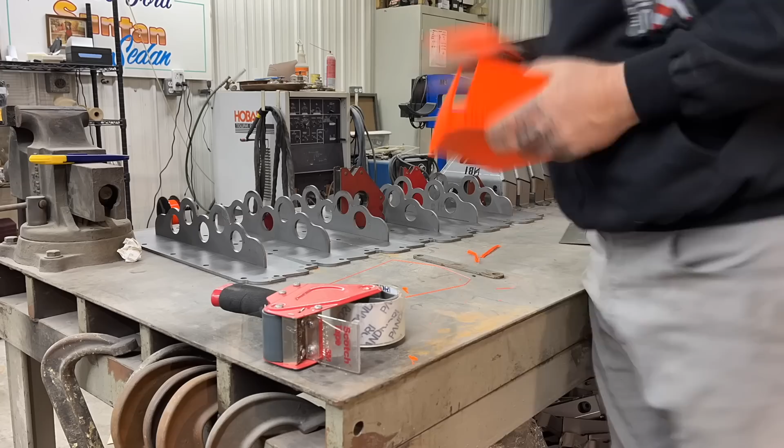Hop in the car, watch it go vroom, vroom.

I told them all that I will

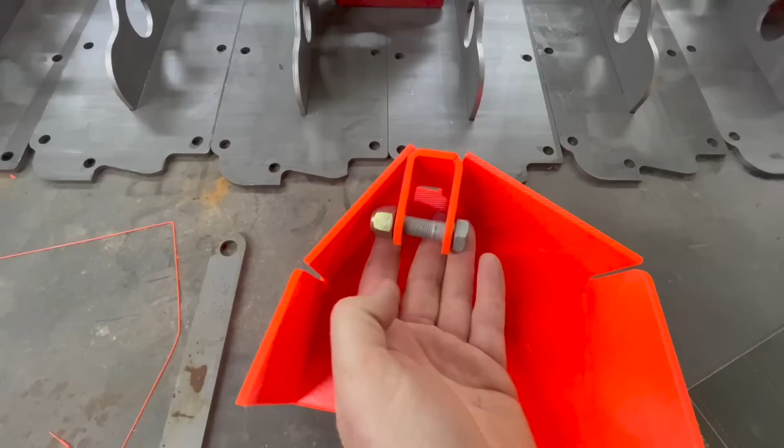So this actually fits a lot tighter than before. Stick it up for you. And it's pretty much just about perfect. The only thing I have to check now is the shock body clearance right here, because before that was the issue I was having. That's why I had to make this longer and redo this and all that, because I had it down here and it just didn't really work out.

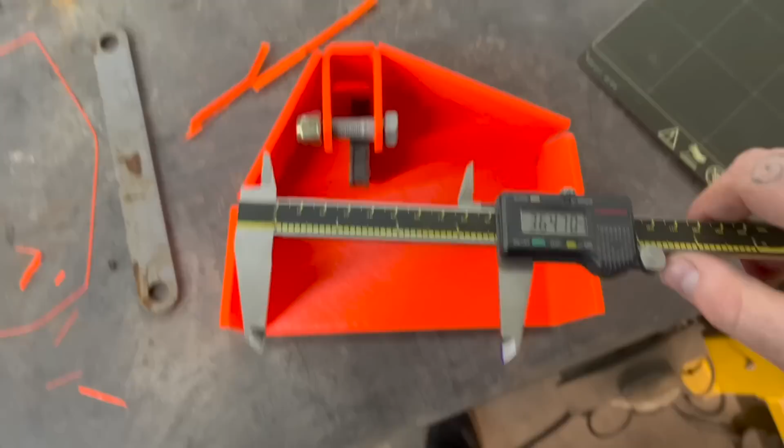So I'm going to have to go grab a shock and see how that works out. So it looks like even if my OD of my spring is a 2.5 inch ID spring, plus say an inch, that's 3.5 inches, we still have plenty of clearance, which the spring probably won't be all the way down here. So I think we're good on that aspect of it.

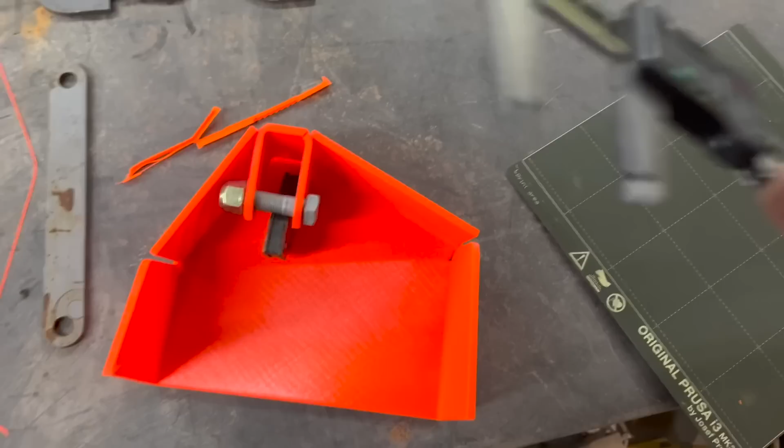So what I'm going to do now is, like I've already said a million times—I feel like I just tell you guys what I'm doing over and over again—I'm going to get these parts welded up so that way I can get these things shipped out to people that have their orders in, and then I'm going to get Lebronze over here and start hacking on it.

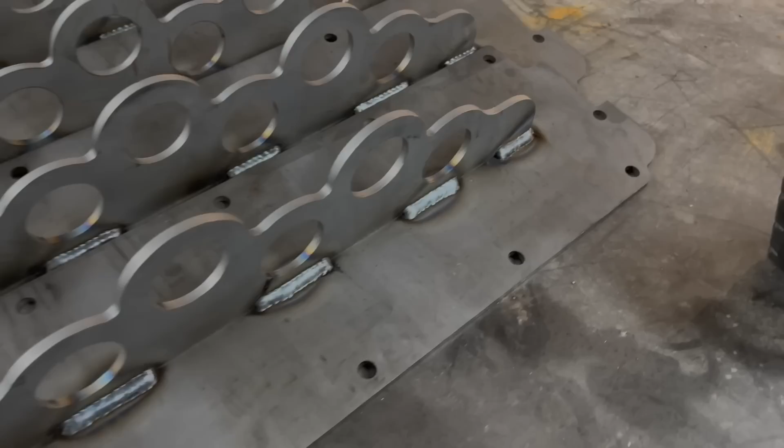I'm in a whip, so I gotta zoom. They tryna talk, they not in a room. I've been so real, I'm dead to the tomb. They in the way, they gotta move. I gotta gas, they running on fumes. Told them way back, it's something new. It's me and Dan, you gotta choose. I'm taking what's mine, I'm doing fine. Don't see the vision, they looking so blind. I hit my lawyer, don't got the time. Crossing my T's and he dotting those eyes. Don't take offense if I do not oblige. I can't belabor like none of these guys. They hit me once and I'm cutting the ties. I was so low, but I'm back on the rise, it's real. Hop in the car, watch it go vroom, vroom. I told them all that I will soon, soon. Knew as a child back in the womb. Oh, told them step back, I need my room. gotta go. I'm looking back, they not even.

Welding is done. I'm just waiting on actual hardware to come in from Grainger for my brackets to ship those out, and I'm just going to go grab some boxes to ship out these motor plates. Everything turned out really nice.

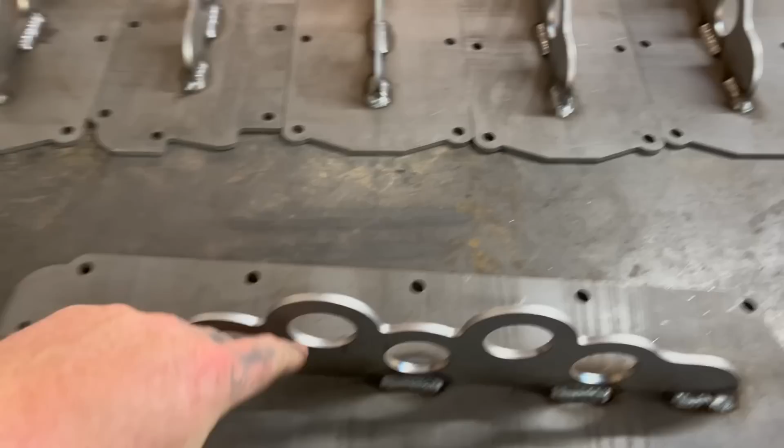The MIG weld's looking pretty dang good, and these are actually, I even welded under here where the 3 pieces locate it, and then ground them flush, so that way it adds a little bit of strength, because I know if people use these the way I use them, they get used pretty tough, so they're pretty rough.

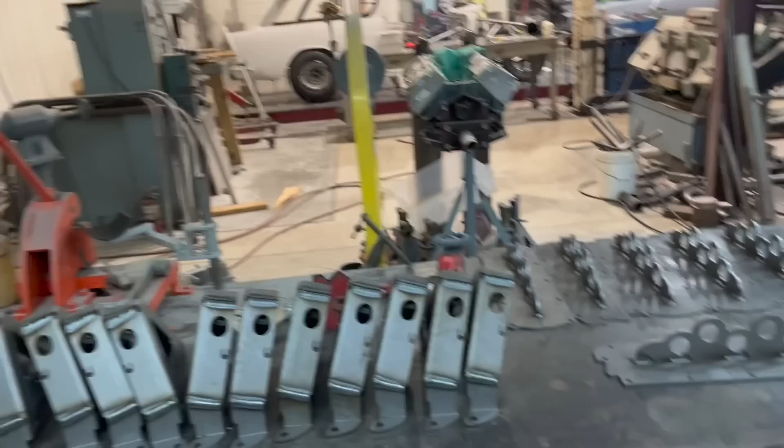All these are looking flossy. Look at that. Ooh, look at that one. Don't call me Domo Arigato Mr. Roboto, but dang, boy, looking like a robot welded these. So, all right, I'm going to pull the Nova in over there and see what I can do with that thing right there.

Stay tuned. The time has finally come. I got my air pump. I'm walking over to Alex's shop where Lebronze is stored. I'll pump up the tires, take them over to Dennis's shop, and I'm gonna actually start cutting on it to get this bracket prototype completely finished and on my site. Because man, I've been trying to do this for a long time. It feels so good.

To finally be able to actually put it on a car. Look at him. This car would be so much cooler if it wasn't a 4-door, but man, I still think it's pretty cool. So I'm gonna air this tire up and fire this bad boy up. All right, let's fire this bad boy up.

Normally, if this thing's already been running, you can just bump the key and it'll freaking fire up. But it's been sitting in here for a hot minute, so let's see. Got a pumper, got that mechanical fuel pump. I love this car. It's so awesome. All right, I'm gonna pull it over to the shop and get to hacking on this thing. By the way, this thing's got all the original interior, all original everything. Now it's about to have that all original Ricky Bobby front travel. Come on.

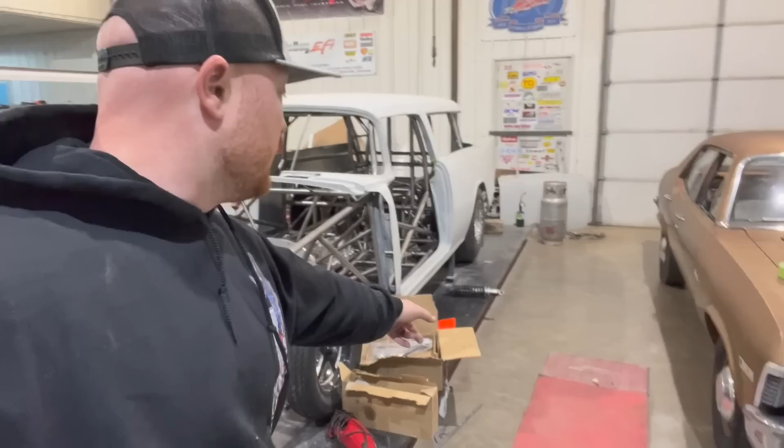But either way, I'm going to give you exactly how much travel this stock V6 Nova has, and then I'm going to see how much I can possibly get out of it. I've got the cheapest control arms. I bought them before I started doing my deal with Trick Chassis, which he's not even really producing Nova stuff yet. So these are the cheapest Performance Online control arms you can buy. They kind of look like the QA1s. I'm going to see how much travel I can get out of it.

I might 3D print me up a ball joint spacer, since I know I don't have an extended ball joint for those, which I know I'm going to need to change. I know it needs more articulation, so I might be 3D printing some stuff. It might be a couple-day process before I ever get the actual max travel out of this, but this is my starting point, and I'm going to take you guys through the whole process.

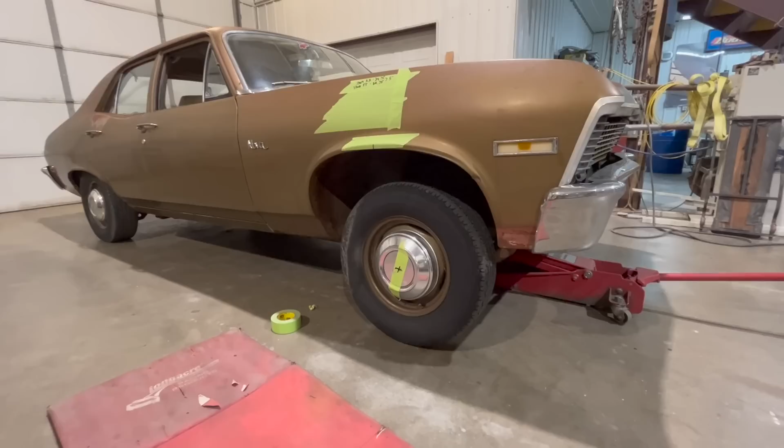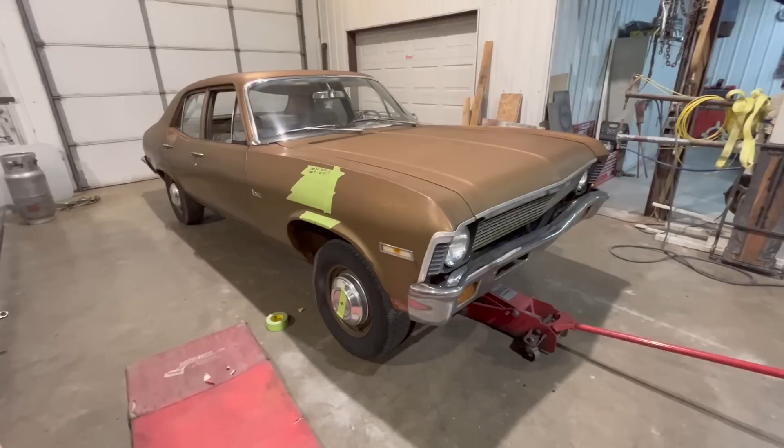So here we are at factory travel. Ride height was 24 3/4, full travel 29 3/4. So we got 5 inches of travel at factory ride height, which honestly isn't too shabby. But one, you don't have adjustable ride height because you don't have a coilover. Two, the spring is short, so you're limited on spring rates. Three, the shock is short and probably has a little less control.

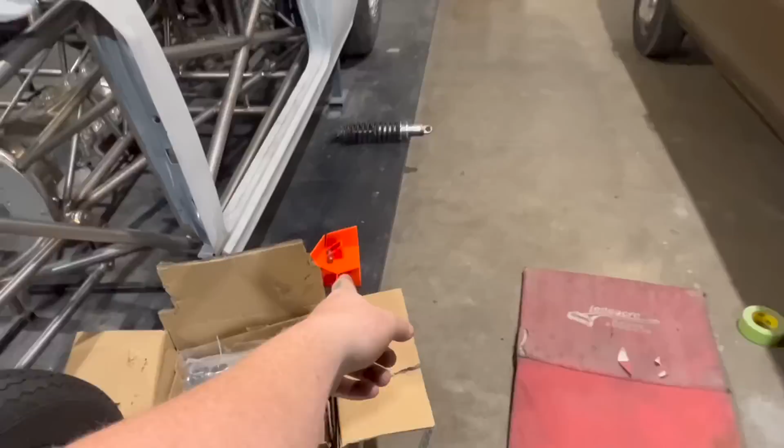So what I'm going to do is pop the hood. I'm going to pull this tire off. I'm going to pop the upper control arm off, take it completely off, and then I'm going to start cutting to try to make this bracket fit. And then once that bracket fits, or if that bracket doesn't fit, I'm going to have to start remodeling that bracket, figure out what I got to do to make it fit. Put that new control arm on.

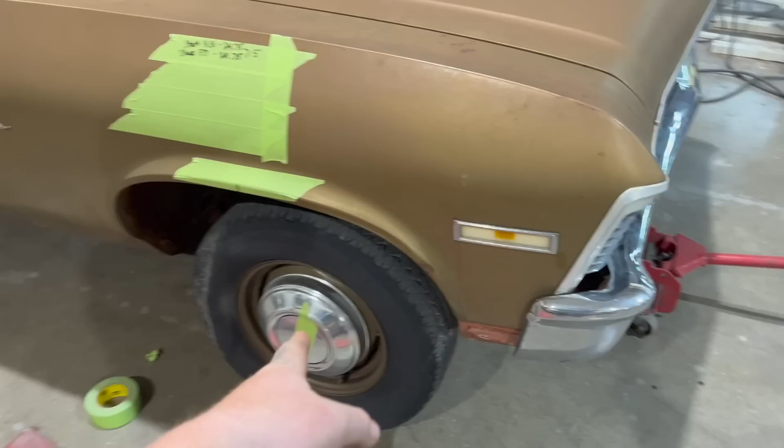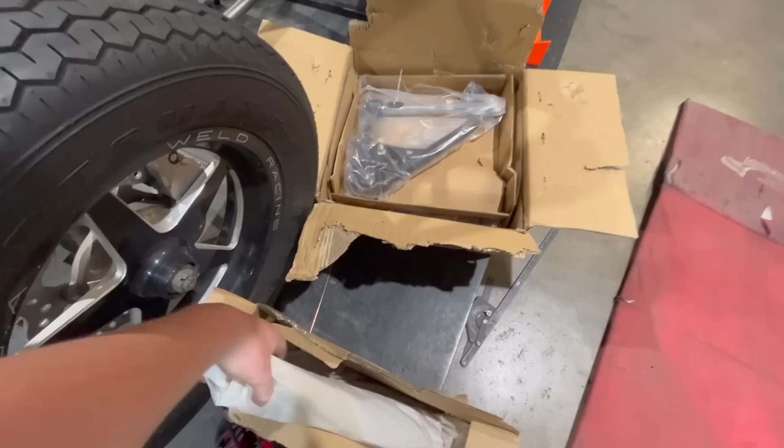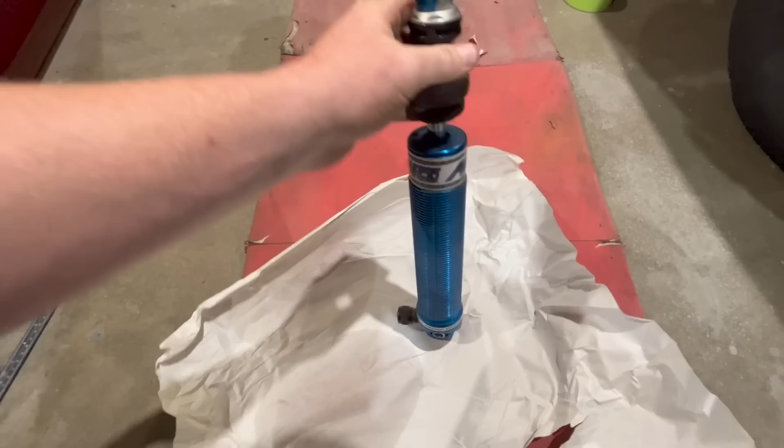I'm going to undo the spring out of there, undo the stock shock, and if I have to change that after I remodel and reprint that, while that's printing, I'm going to see how much travel I can get out of here. And once I get the full travel that I can possibly get out of this setup, I'm going to see if these AFCO shocks that I got will work, because these are about the size. Looks like they might have leaked. That's no bueno. Maybe they'll have to get rebuilt. Either way, they're used. I'm going to see if these will work for the height that I want on the shock, and then go from there.

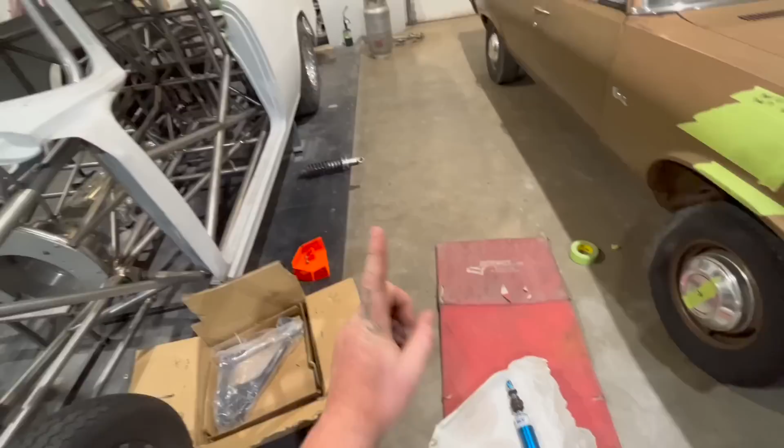So step 1, see if the bracket fits. Step 2, make needed changes. Step 3, get the full amount of travel I can possibly get out of this setup. So I'll probably have to pop the steering off. Like I said, take the spring, stock shock, everything out of it until I can get the most travel possible. And then we'll go from there.

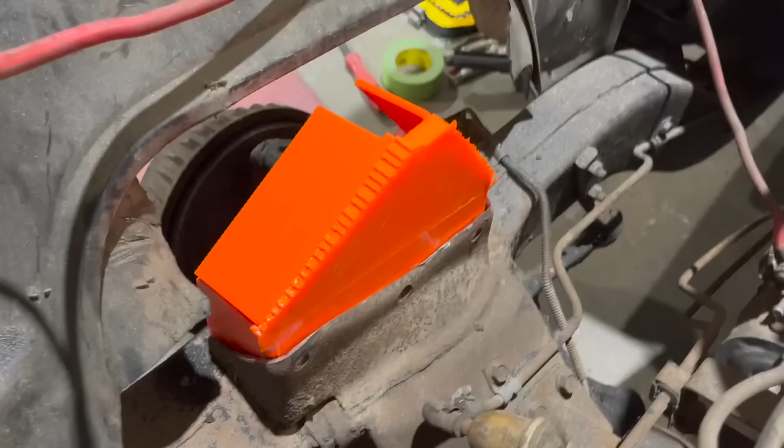Look at that. I've probably spent 15 minutes cutting. All I had was 15 minutes. Cut that, clean that up, and that thing literally set right in there. Look how good it fits. There's just a small gap here, but once you bolt it tight, that gap will be gone. And obviously, most people would weld all this, but it'll have bolt holes here, here, and I guess there's even another hole there you could bolt it to.

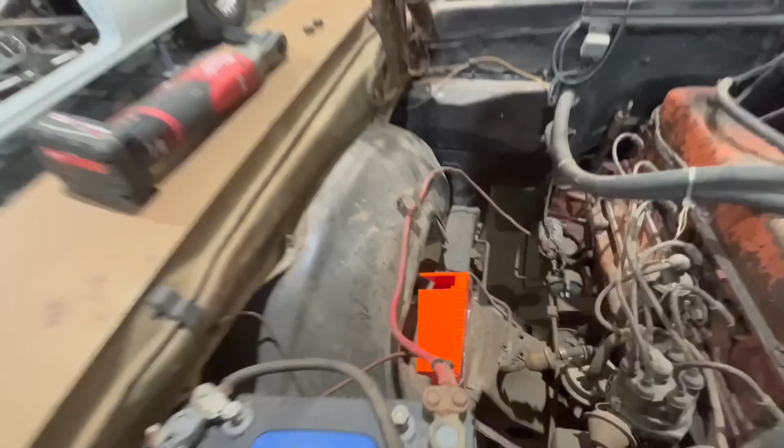Dang, I'm happy about that. Look how good that fits. I still haven't got those supports off yet, so it's not gonna look that ugly, but that thing just sits right in there. And look how it still fits inside this factory wheel well. If you had an LS motor, it wouldn't be. This is really just a little bit taller than factory. So the main thing now is I gotta see if it fits inside those control arms or if they hit anywhere, which I don't think they're going to.

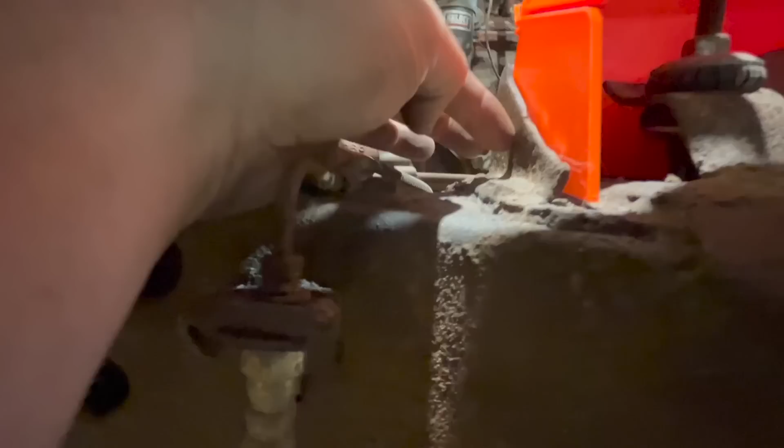Check that out. I left that shock on there, but this is a 90-degree bend. I think I could make that like an 87, barely anything, and get that to where it sits on there perfectly. But either way, you could clamp that and weld it. But man, look how good that sets in there.

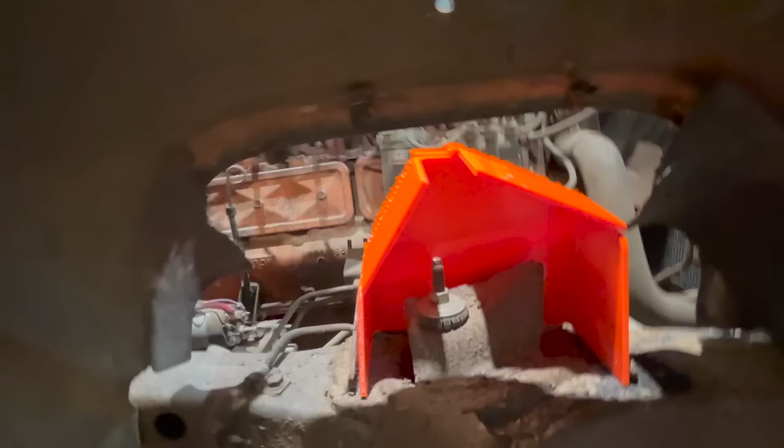So this little spring pocket right here is kind of hitting back there. You can see it's holding it up a little bit back there. So I may notch that before I mark for my control arm holes, but pretty giddy about this whole ordeal. Let me see, I don't know where my shock piece went. Let me grab it. There it is.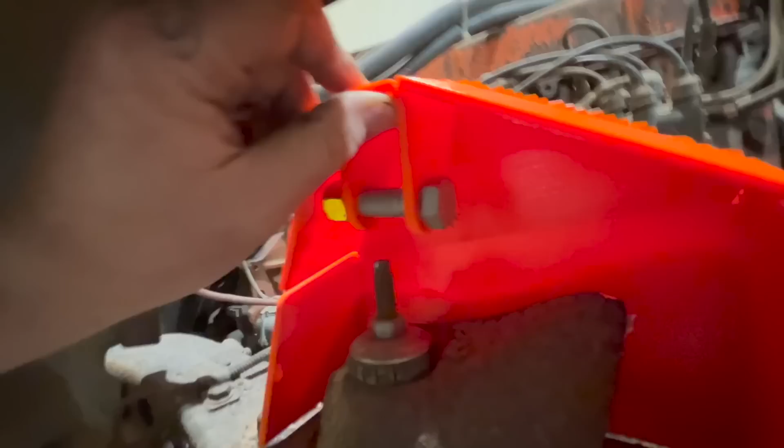Look at that. Lines up perfectly. That shock will be mounted down here and go straight up to that mount right there. Man, that's gonna be freaking nice. I'm so happy about this whole ordeal.

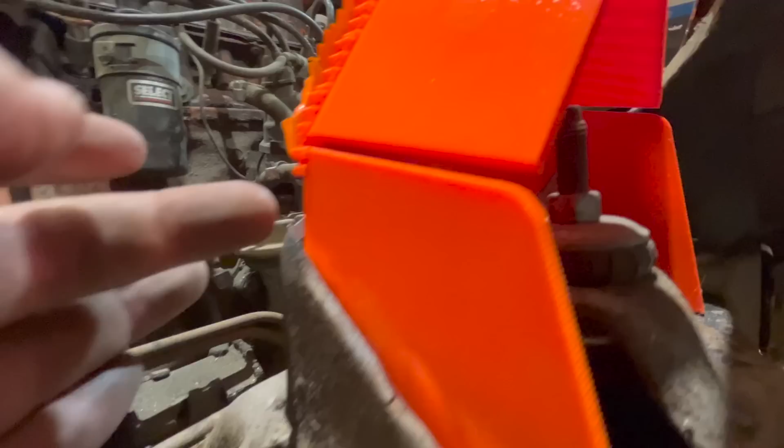And so this will actually, I could lower this, but once I notch it, it'll lower it a little bit so this isn't sticking so far up. It'll be a little more aesthetically pleasing. But for a first time fitment, that right there, it's got me pretty excited. Look how it just sits in there so perfectly.

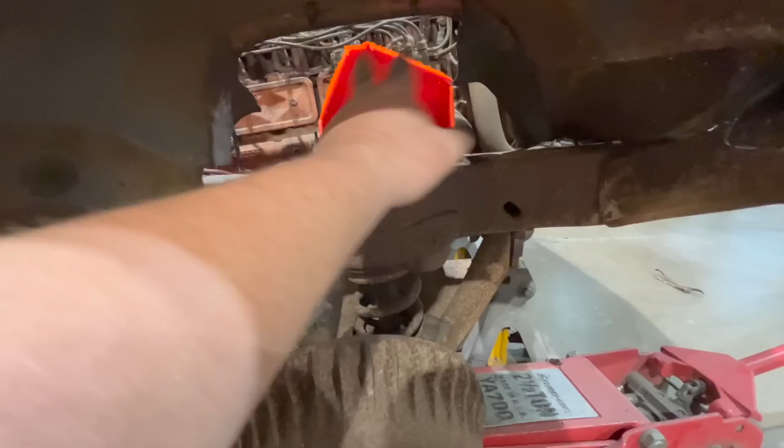And the install would be, you could have both these things installed. You could have stock suspension, and you could have both the pockets cut out, trimmed, everything for the mounts, all that in a few hours. You could bolt this whole kit. You could do a whole long travel kit in probably 2 or 3 hours.

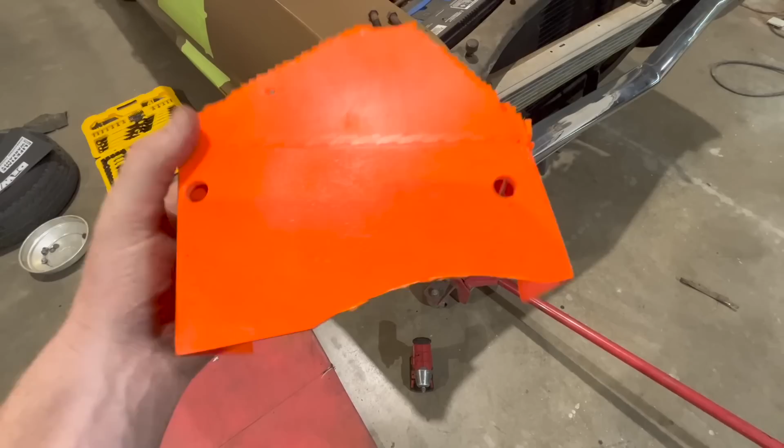Let's go. So I notched this just a smidgen right there, and then I marked and drilled my holes. So I'm gonna set this down in there, put those through there, and then see if that control arm will fit. Because I'm just extremely satisfied with how this is all turning out right now. Sorry, I'm trying to show you these holes, but look at that.

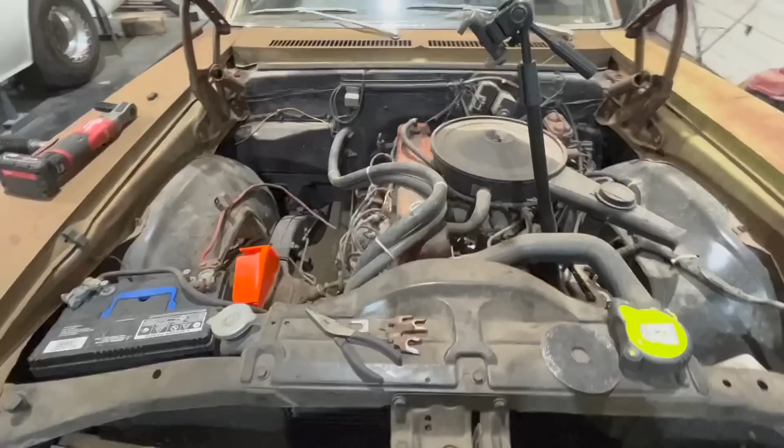It's so flipping awesome. Just to think, I just took some measurements, drew this thing up in CAD, printed it out of thin air, and now it's possibly going to be a full-time production piece that people are going to bolt on to their Nova. This is what gets my blood flowing.

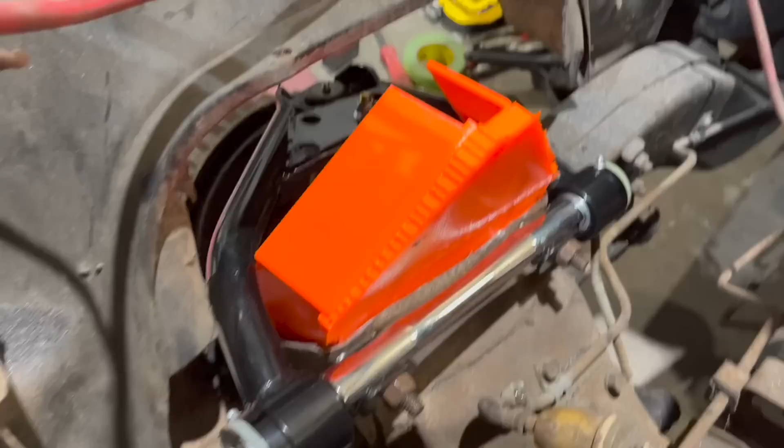Okay, first issue with this cheap control arm, which I'm trying to make this whole kit around any style control arm since Trick Chassis doesn't have Nova control arms just yet. And a lot of people have, honestly, these cheap Chinese ones.

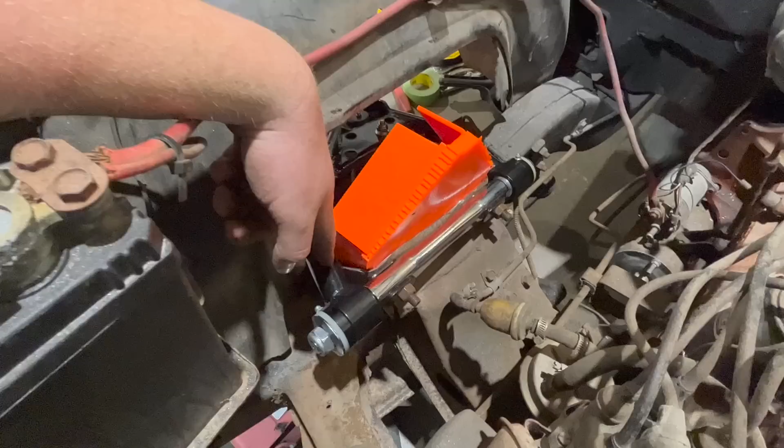So my bracket, I was worried about this, is a little too big right here. So I'm gonna have to change the angle of this and the height of this to make it slope down more, which I think will make it look better. Anyways, I was just worried about being too short for that and screwing up the whole print. So I'm gonna go make some adjustments and start printing another piece.

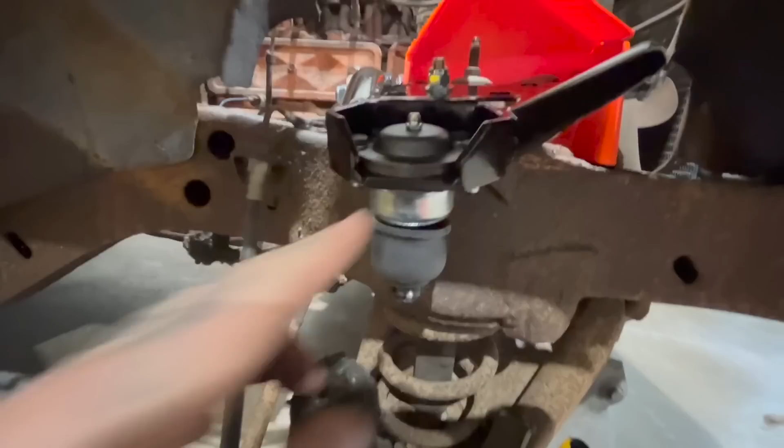Once I get the adjustments made, I'm gonna start by trying to figure out how much travel we can get out of this bad boy by A, taking this stupid bump stop out, B, probably cutting this out or trimming that at least, and then C, I'll probably take this, bolt it on the bottom, and maybe even make a spacer for that to give us more articulation.

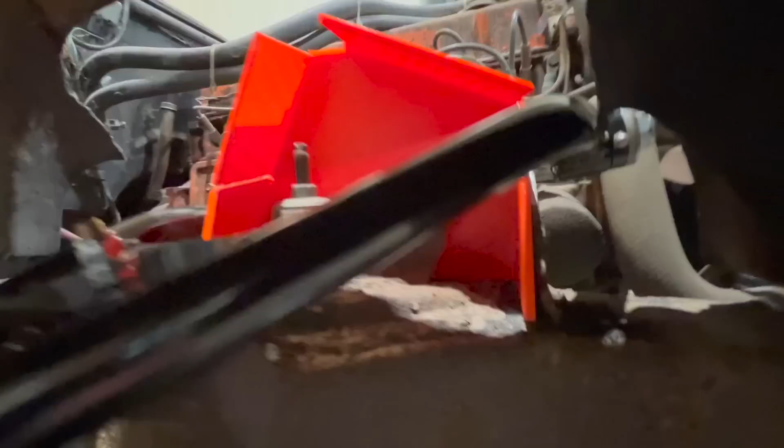So as you can see right now, that's hitting. So just gotta do a little trimming, but other than that, man, still so freaking pumped about this whole setup. I'm really excited about it. I hope you guys are as excited as me.

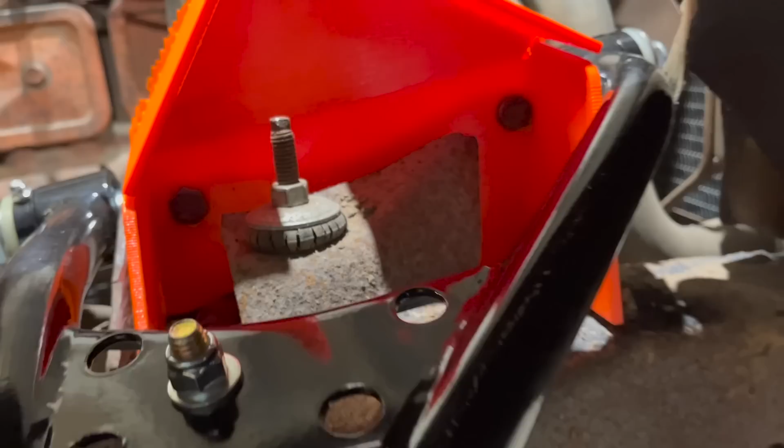Sorry, sometimes I don't English so well when I'm excited and talking on camera. I get nervous. So, all right, I'm gonna go do some design work.

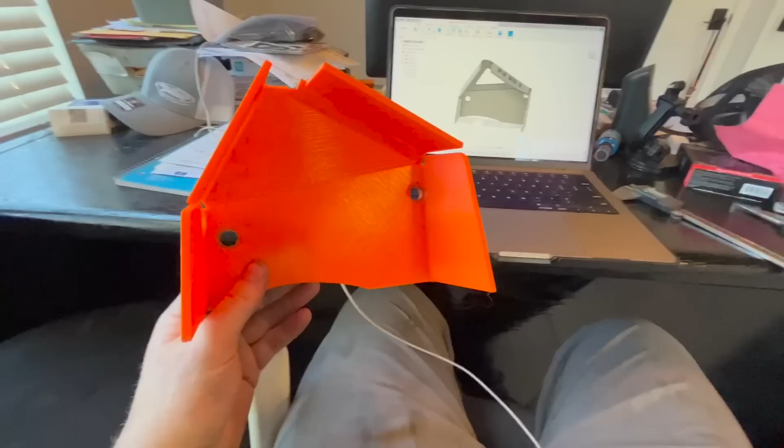I'll be right back. Well, after a lot of measuring and reconfiguring, this is what I came up with. I went ahead and cut the relief in the back because we don't need all that metal back there, and I put my business logo initials on there.

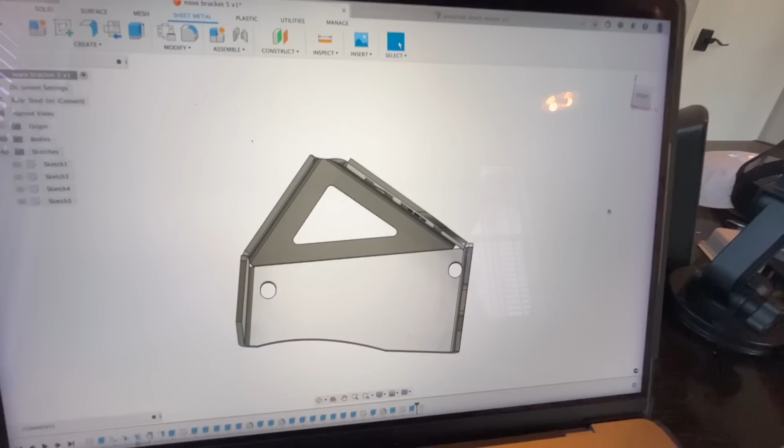So what I ended up doing was lowering right here. So the bend point was up here, and I lowered the bend point on both sides, which brings this down probably another 1/4 of an inch, and then I obviously trimmed this right here for the control arm, that whole area.

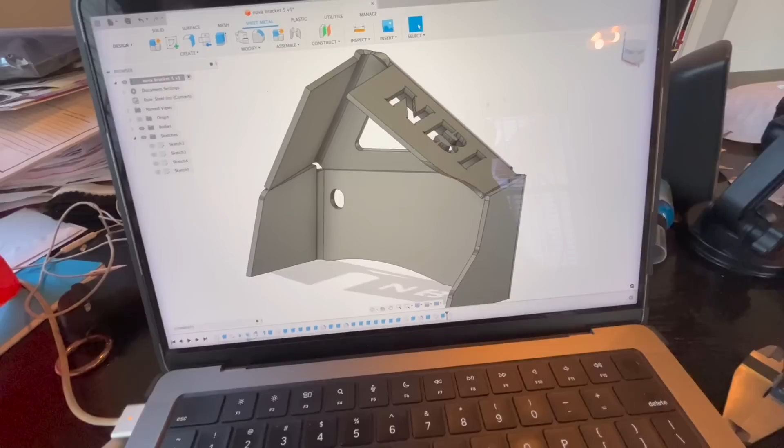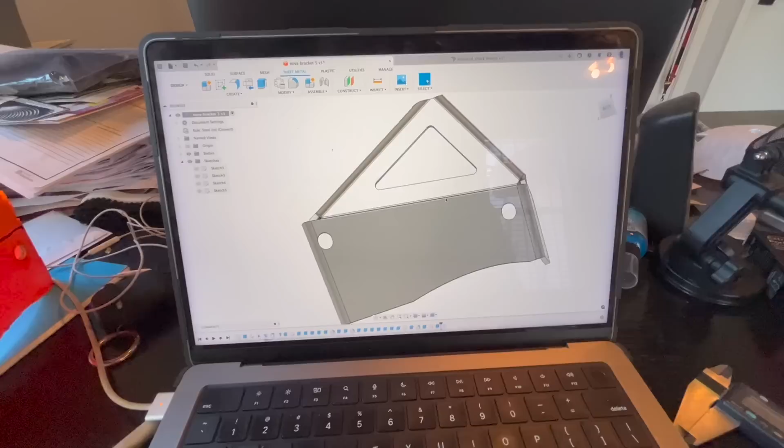I lowered this down here, and I trimmed that right there for the little hump that's in the frame. I put our bolt holes in there, and I made them elongated. They're not wide, they're still the same width, but they're just a little bit elongated, so that way it gives you a little bit of wiggle room when putting them in, because I know not every frame is probably the exact same. So yeah, that's where I'm at.

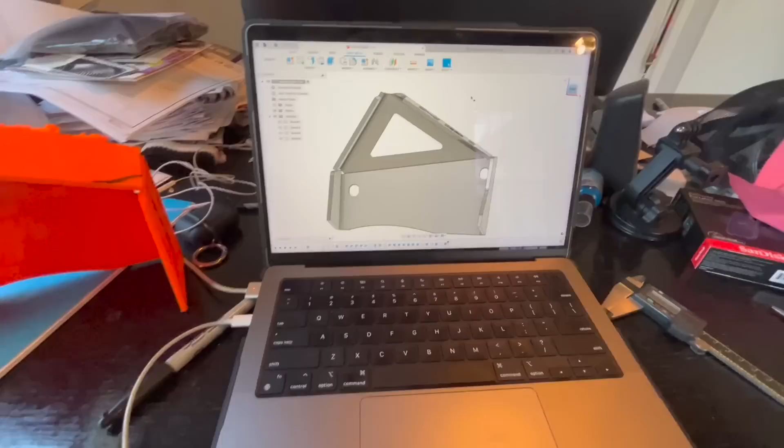Like I said, you can see there's more rake right here now. There's more angle on that one than there was in this one, just a little bit more. So this one should look a whole lot better and fit a whole lot better. And I also kicked, you can barely see it, but this piece right here where there was a gap, I kicked this out 2 degrees. So not a whole lot, but it's the little things that make the big differences when installing pieces and making production pieces. So this will probably be another 11 or 12 hour print.

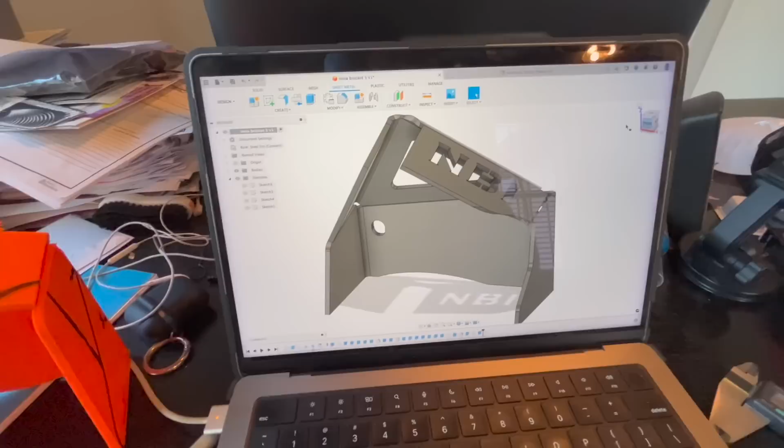So I'm gonna go get my SD card and get this thing printing, so that way I can go out and keep working on trying to see what I'm gonna do to make the maximum amount of travel on this Nova.

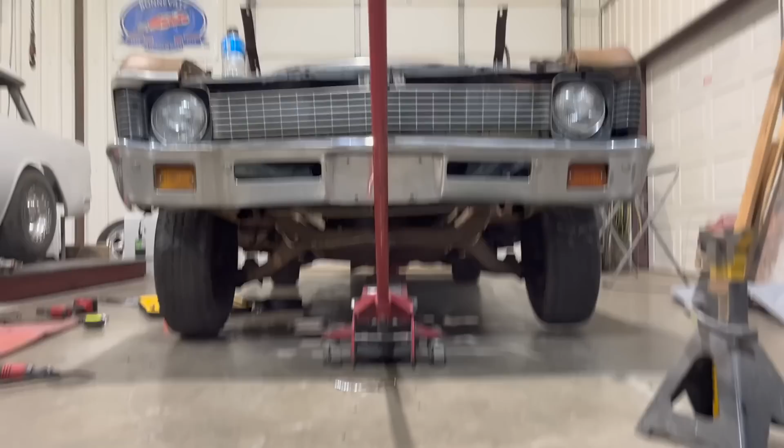All right, so here we are. I've got the old shock out, stock springs, stock control arms. All that's gone. The only thing that's in there right now is the factory lower control arm and the factory upper control arm. And if you see in my time lapse, I put the ball joint on the bottom of the control arm to try to give us a little more articulation. And all that netted us was, well, my measurements say 1/4 inch more of travel. Looks like maybe a 1/2, but according to my measurements, we've only got 1/4 inch more.

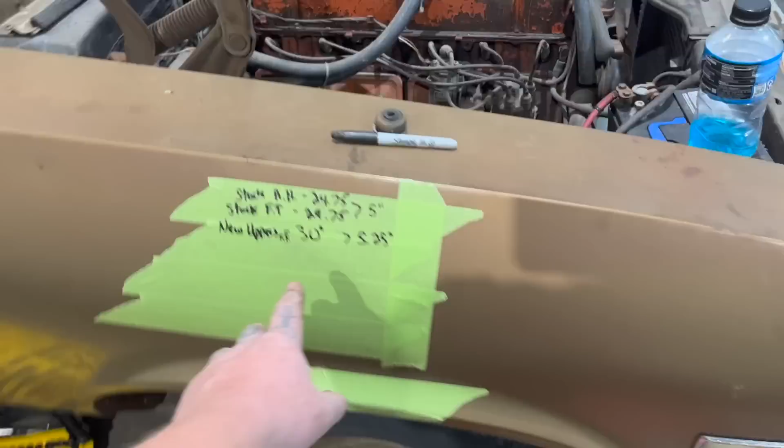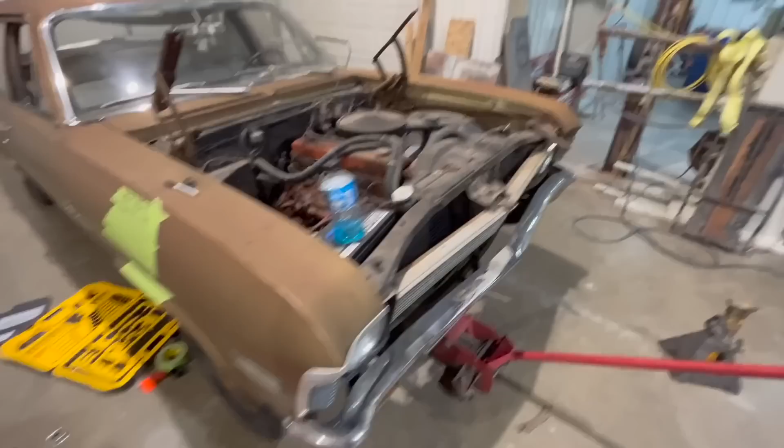So at full extension with all the stock stuff, we're 29.75, and right now on my mark to the ground, we're 30 inches, so 5 and 1/4 inches of travel now. So this is all part of trying to figure out what it takes to get more travel.

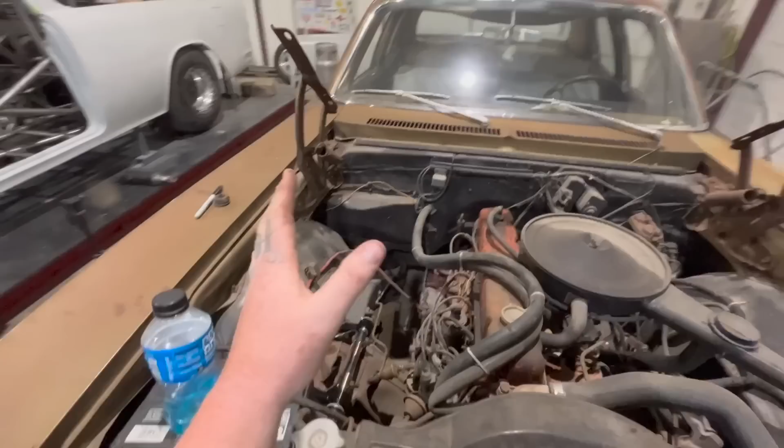So now what I'm gonna do, sorry, I keep moving the screen back and forth. First thing I noticed, this is all part of it. You do one thing and then see what the next thing holding you up is. Do that thing, see what the next thing holding you up is. And you keep doing it until nothing's hitting, nothing's binding. Normally, the only thing that stops you is the angle of the ball joints, and you can only do so much for those. That's normally always gonna be your travel limiter.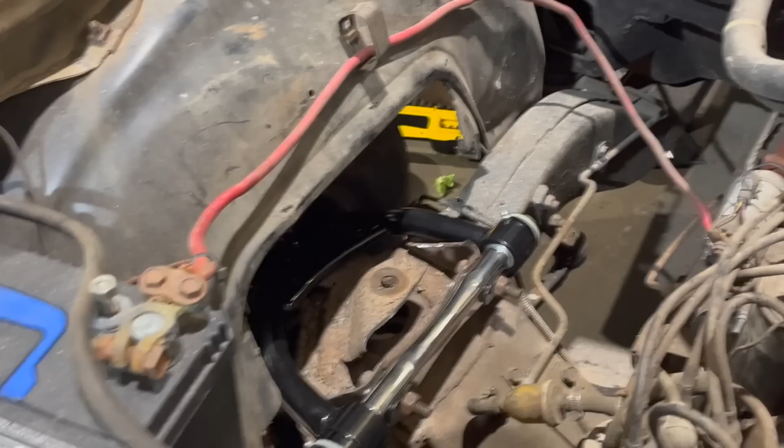So, right now, you can see my A-arm is hitting the bucket for the shocks. So right there, I'm gonna trim either the control arm or the frame; I'm gonna end up trimming the frame anyways. So I'm gonna pull it back apart and trim one of those, so that way I can see how much more travel that nets us. But looking at this, it looks like our ball joint is already close to binding because it's only got so much travel. It's just a cheap ball joint.

I've got the new design printing. So while it's doing that, I'm trying to figure out what's going to limit me, what I'm going to need, and when I'm going to need it. So try to figure out everything I need today, get it ordered, so that way I'll have it next week, because it's Friday today. So I'm going to get as far as I can today and then order what I need to order, so that way I can figure out how to get maximum travel and how to put a kit together for this thing.

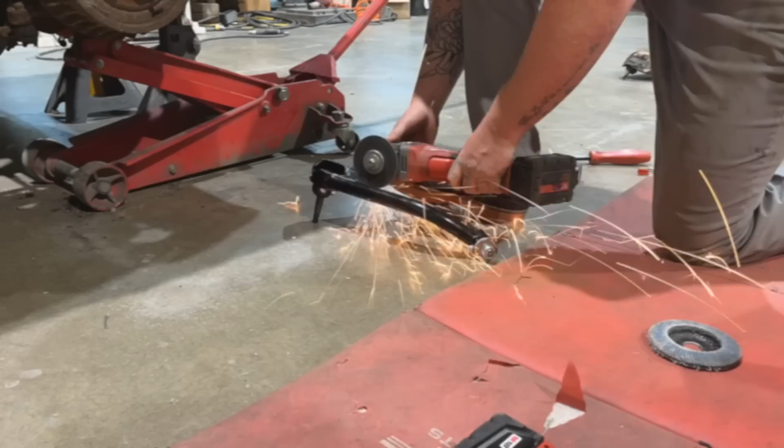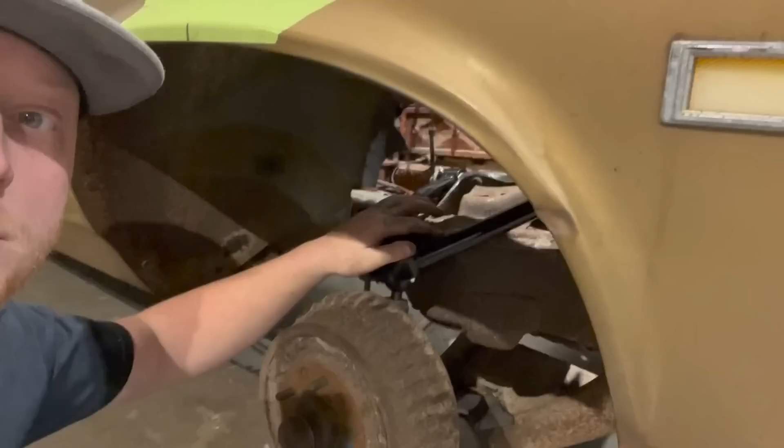So I just measured from here to here and cut this little brace out. Apparently it wasn't hitting like I thought it was, because it gave us no more travel, and nothing is actually hitting. The only thing binding right now is this ball joint.

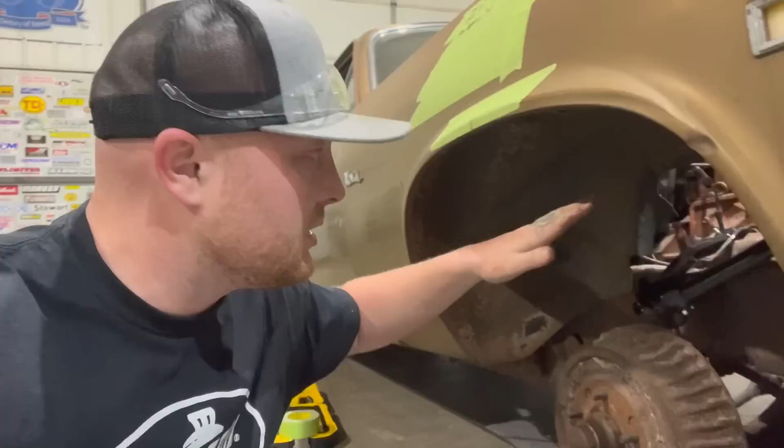So what I'm going to do is 3D print a wedge, like a spacer shaped like a wedge that'll kick our ball joint back down and give me more travel. And I know you're saying, well, what if you already have control arms like this? Well, A, get longer ball joints, but I don't have that right now, so this will kind of be like I had an extended ball joint.

Or B, I can have these made out of billet, sell them, whatever. Also, if Trick Chassis wants to start creating these arms, I can ship him this control arm with the angle of the ball joint that we need, and he can make his control arms with that exact angle, so that way nobody has to do anything crazy.

So I'm going to pull this thing back apart and try to go design this little wedge thing while that over there is printing, and I think that's going to be where I stop for today. So that's probably the end of this video. Maybe not. I guess I'll video my little wedge deal that I'm gonna make, and then yeah.

So it's been a good day. I really feel like I made a lot of progress. I learned a lot already about this, and I made a lot of progress on the brackets itself. So it's exciting stuff, and I'm gonna keep on chipping away at it.

That's why I was so excited to get this thing in here, because I knew obviously what I already had wasn't going to be the perfect fit, and it wasn't all just going to be super long travel right off the bat. So what I'm trying to do is get the most travel efficiently, so that way all you no-prep guys and gals with the Novas and the Camaros and stuff can have more adjustability. So I'm gonna keep working on this, and I'll give you an update here in a bit.

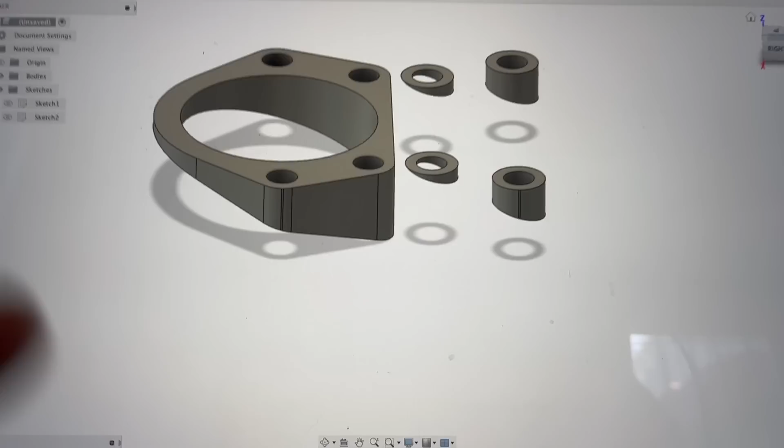So what it's gonna do is, when the arm comes down, it's gonna bind like this. So then I'm going to kick the actual face of this way to make this not bind that way. It's gonna take up the bind. It's kind of hard to explain without seeing it there, but you'll see it once I get it printed and done.

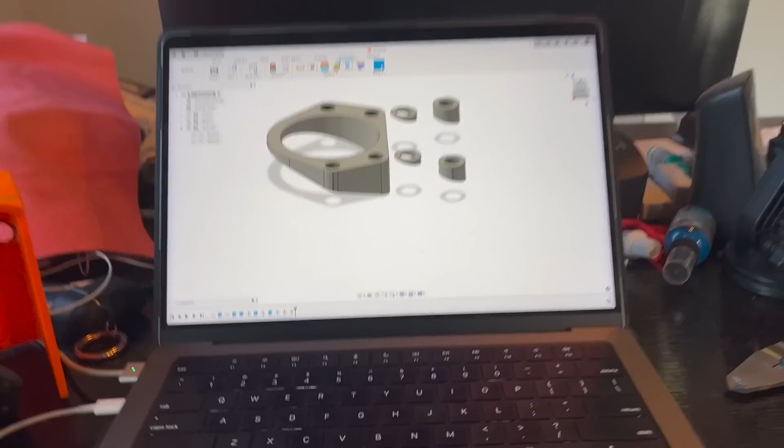But for now, I have to wait for the other bracket to get done printing, and it won't be done for like 8 hours. So I'm gonna go back there and weld up some more brackets, package some stuff up, get it ready to ship out, and just keep working.

So that's the end of the video for today. I'm kind of at a stopping point, and tomorrow is a brand new day, and I'll be able to put the other bracket on, this on, and see where we stand, see where we go from there. So lots of progress today. I'm really happy with how everything's turning out, and I'm excited for tomorrow. So I'll see y'all later.